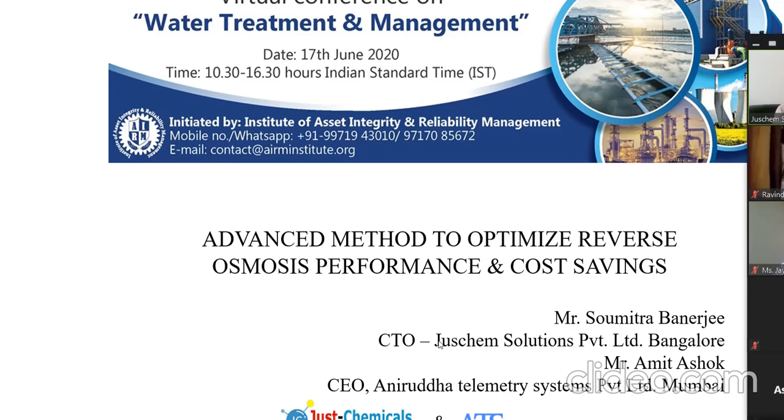My education background is MSc Applied Chemistry from Government Engineering College, Jabalpur. I have 25 years of experience in major power plants. I was head of chemistry and environment in Tata Power, Adani Power, Jindal Power, and LPGCL Bajaj Energy. I'm the founder and chief technical officer of Juschem Solutions Private Limited. My professional expertise is water treatment and power plant chemistry only.

So this is about me and about my company. I passed in 1995 and then worked with major companies, and also worked with Ion Exchange Service Limited as the branch head in Mumbai. We have a company called Juschem Solutions Private Limited here in Bengaluru, where we do power plant chemistry audit, water management, training, troubleshooting, commissioning help, consultancy for WTPs and ETPs, cooling water treatment, boiler water treatment, effluent treatment, and reverse osmosis operation excellence.

Now this is about the topic, and here is why I am presenting this topic to you: my purpose is to use our knowledge and expertise to help RO plant owners throughout India save currency in terms of reducing RO membrane costs. Why so? Because I have seen in many plants in India that the RO membranes are lasting only for 1 or 2 years, not only in raw water treatment but also in the wastewater treatment section.

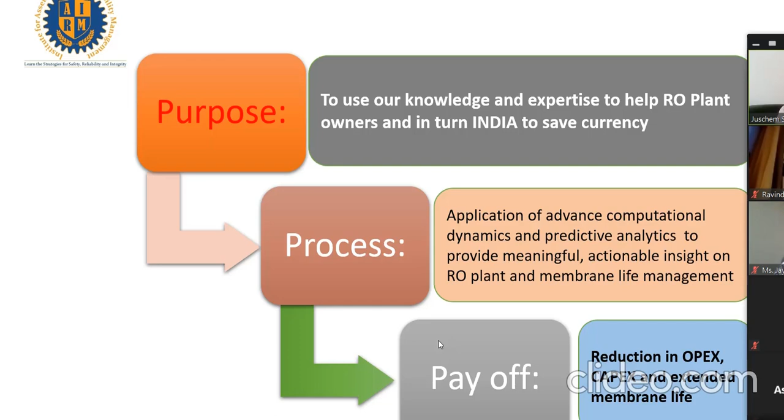So I'm going to tell you in this prescription also what commodity chemicals you must use. Our solution will give real-time health status of your membrane system, predict failure of the membrane, and importantly give prescriptions. So finally, what is the payoff? The payoff will be reduction in OPEX, CAPEX, and extension in membrane life.

So what is the current situation? I saw in the US, when I was working with Birlasoft, I went to US for GE Power. I saw there is high turnover of workforce, and in India we see lack of experience disrupting operational excellence. Data is available in plenty. Online measurement of parameters goes to DCS, but data remains data unless it is transformed into meaningful, actionable information. So data is not translating into insights and predictions.

We will do that. Our lagging indicators - we have only lagging indicators. There are two kinds of indicators: one is a lagging indicator, once it has happened, like a corrosion coupon. If we see corrosion more than 3 mpy, that is a lagging indicator, corrosion has already happened. But if you see it through a corrator corrosion meter, then it will be a leading indicator.

So we will be providing leading indicators, but the design by OEMs are only lagging indicators. There is high cleaning frequency, downtime and associated cost. Why it is so, what are the indications and what to be done will be told by our solution beforehand, at least 10 to 15 days before.

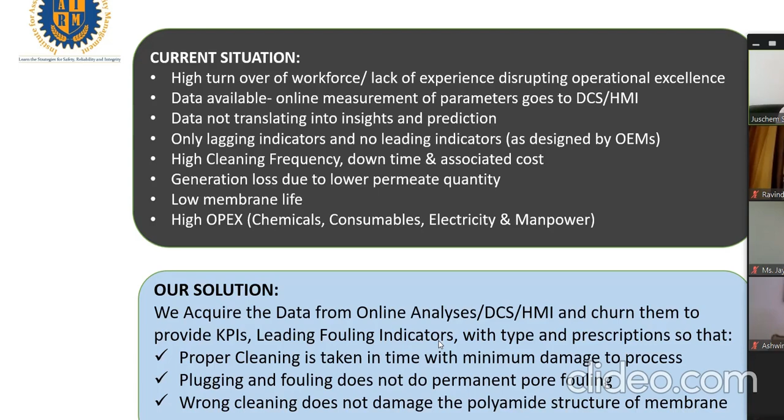So this is our solution, where we make customers well informed about operation and predictive maintenance needs, resulting in optimizing efficiency and effectiveness of processes.

So business challenges: no real-time monitoring of KPIs, reduce unplanned outages, meeting production target and demands, deterioration of plant efficiency, high energy consumption, reduced life of membranes.

Our solution reduces these operational costs by predicting and preventing membrane failures, thereby improves plant efficiency and effectiveness. It gives extended membrane life, envisage deterioration and prevention. It reduces OPEX and CAPEX. Operational effectiveness, cost and revenue savings are there with our solution, and optimize specific power and chemical consumption.

We will give you real-time analysis on your mobile, on your tab, on your computers, on your laptops, any such devices you want. And there is a predictive analytics into it. We will do the regression and send you the predictive capability to optimize maintenance schedule, operational cost, and we will let you know beforehand when to take a shutdown or when to go for cleaning.

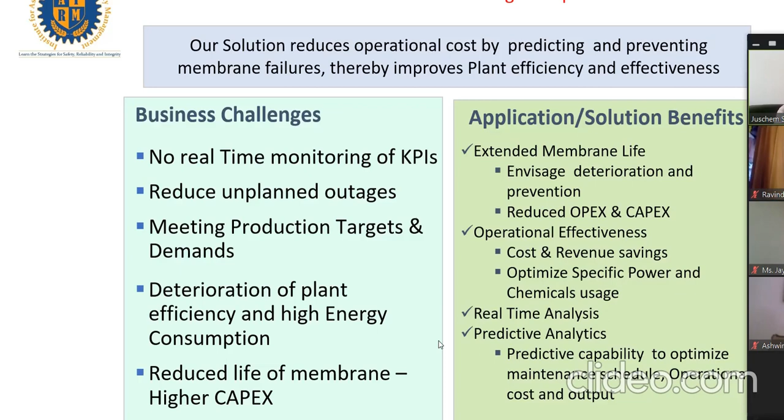So we have the ability to predict maintenance needs and membrane life using conventional and custom calculations. The problem: we are unable to predict a membrane failure using the current data, causing disruption of plant operations and high OPEX, high number of membrane change and high chemical cleaning.

So the solution will be a better predictive model to respond proactively rather than react to a membrane failure.

What are the KPIs we are going to use? Normalized permeate flow, net driving pressure, normalized salt passage, normalized differential pressure, percentage recovery, normalized membrane flux - the leading fouling index will give you a leading fouling index and will give you an RO health index.

So we'll do a fault detection on process versus sensor, and we'll let you know beforehand how to do the membrane preservation, membrane cleaning, and we'll do the membrane life prediction as well.

The next steps will be building site-specific transfer functions and select pilot sites for implementation. Requirements: the design data will be required and sensor data will be required.

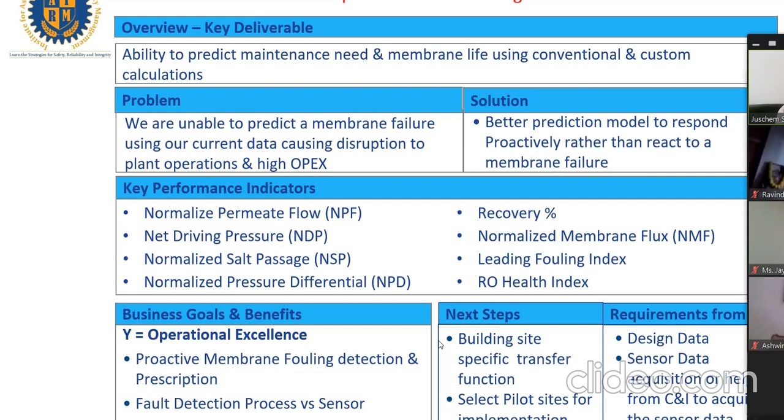For sensor data, ATS, Aniruddha Telemetry Systems, will work as a data acquisition firm who will try to get the data from HMI, DCS or the Modbus, or will replicate the online analyzers.

And this is how your screens would look like when you have it in your computer or in your laptop or in your mobile or in your tab.

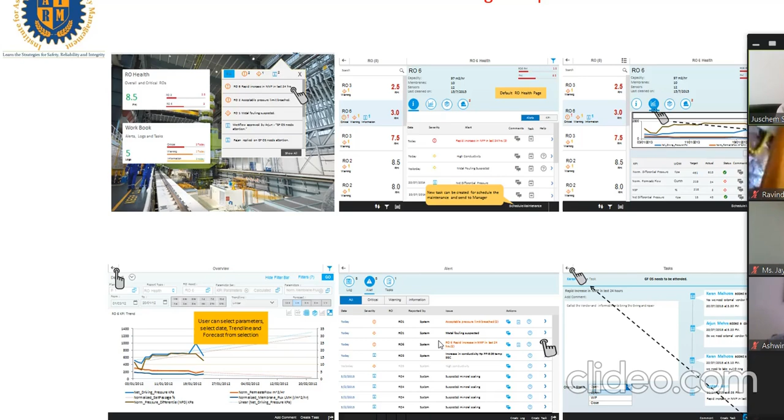We'll go to the next screen because we are not having much time in hand. We are already lost some. So we'll try to speed up a little bit.

Computers, laptops and all, and you will have all the data for all the people who are functioning, like for managers, for operators, for super managers, for chemists, everything would be there.

So actually, why am I going to do this? In my last 25 years of experience, I saw that the salt passage of the membranes increased considerably within 1 year.

In power plants like Adani Mundra or in LPGCL where we are using RO plants much, the salt passage when we install the plant is only 1%, but within 1 year, due to frequent cleaning or due to many other disturbances, it goes beyond 3. And beyond 3 means 3 times.

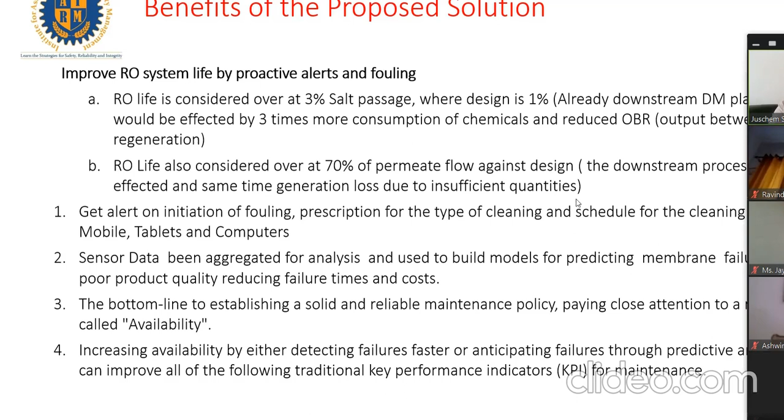The downstream processes are also affected. So we'll get alerts on initiation of fouling, prescription of the types of cleaning, on your mobile, tablets and computers. The sensor data will be aggregated for analysis and used to build models and predict membrane failures. The bottom line: to establish a solid and reliable maintenance policy, pay close attention to the measurable called availability, which will make your plant more available by detecting failures faster or anticipating them through predictive analytics.

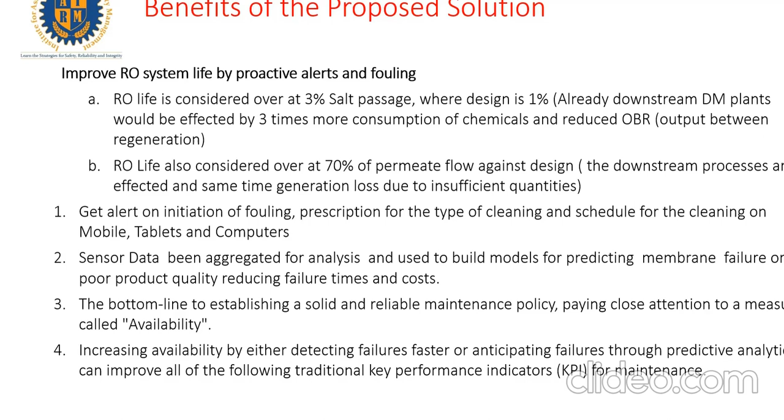So these are the current problems quantifying the business pain. There is loss of plant availability by 10 to 30% due to membrane failures and membrane fouling. There is a drop of permeate quantity by 10 to 30%, and a drop in quality where salt passage increases drastically. Some people even run at 10% salt passage, I've seen them. And there is an increase in specific energy consumption by 10 to 25%, because permeate quantity is reducing but electrical consumption remains the same.

And there is a reduced life of membranes due to time-based cleaning.

Reverse osmosis membrane based plants are used to produce water for potable or industrial purposes. They are also used in seawater desalination and wastewater recycling. Like all petrochemical plants such as BPCL, HMEL, they have huge RO systems for recycling wastewater as well. The membranes are imported to India from US, Japan, and China. Till we produce petchem, the polyamide, which will be 100% export, we need to save foreign currency. BPCL Kochi is planning to make this petchem polyamide, but I don't know when that time will come.

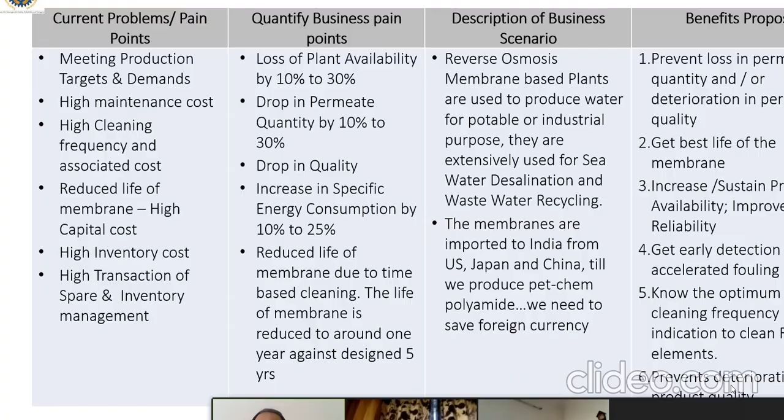This is how it will look. Now here is an indication, you'll see the red star here. That red star indicates that your fouling has initiated and is going to cause a problem. So if you do not clean within this period, the fouling is going to permanently damage your membrane and you may have to replace it faster than you should. This is the lead PPI, lead plant performance index, which will help you identify when to clean, when you get the indication.

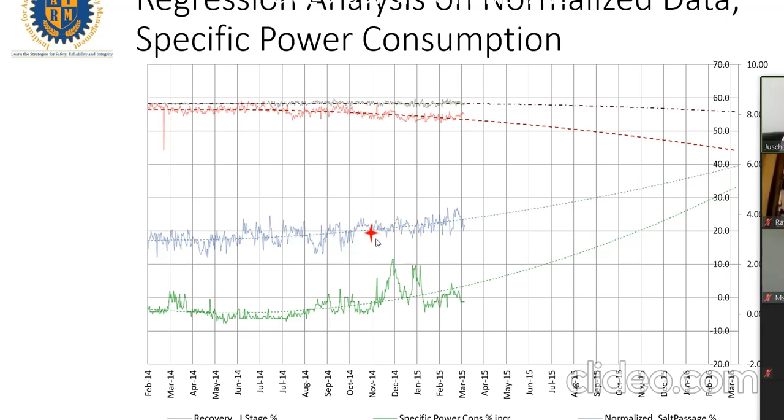And here it is. Again, if you see the NDP, net driving pressure, is increasing, then you need to clean this membrane, and this indication will come earlier, telling you when to clean it.

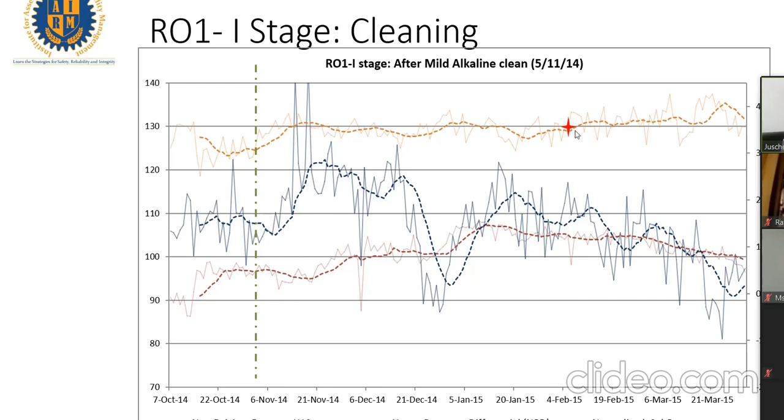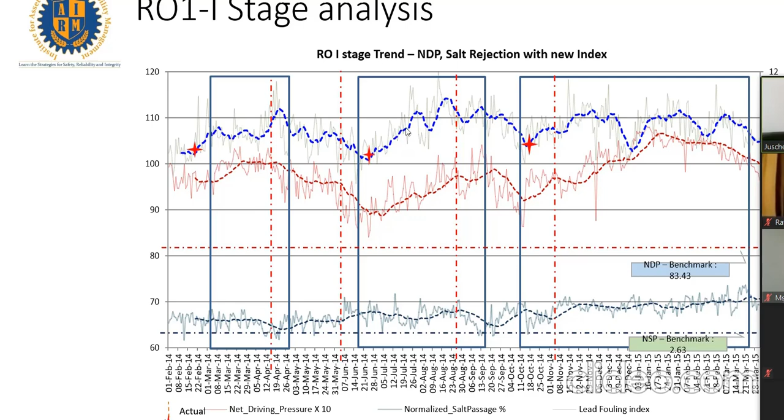This is an example of one use case where we did RO first stage trending, and we gave them a solution indicating this is the time to clean. They cleaned it, and slowly the lead fouling index started coming down. We give the lead fouling index again, saying this is the time to clean, and they take cleaning here. But when they take cleaning here, the baseline data does not come back to the original, you see. So the delay in cleaning has caused this problem. You need to clean it somewhere earlier so that you get an optimum result out of your membrane.

Now again here, the same thing, RO first stage trend, NDP and NSP, normalized salt passage. We indicate here and you see the trend if they do not do the cleaning properly. This is in one of the biggest cement plants in India, and the delay in cleaning has caused them a lot of problems.

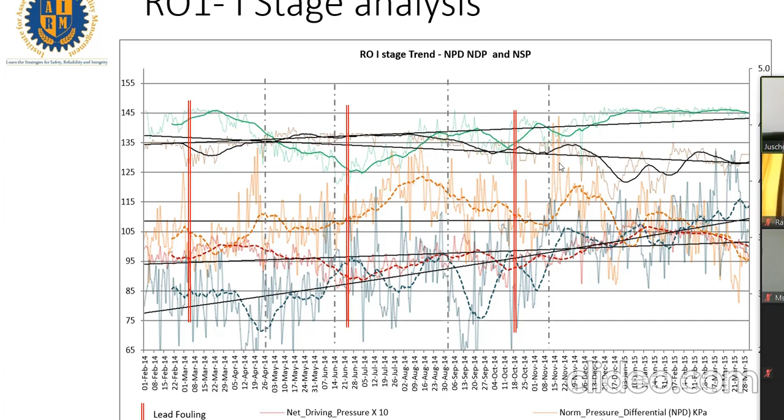So the normalized graphs and regression analysis explain good and bad operation and maintenance practices with good chemistry control. This red star will denote in the slide as it predicts the fouling as lead fouling index almost 45 to 60 days before. In the use case, the specific power consumption went to 10.5% more than the actual. The specific power consumption was predicted to go 20% higher by November 2015; it was done in August 2015. The normalized salt passage is on the higher side and deemed to touch 5 to 6% by November.

So this was one of the cases where we gave them the solution and they were happy with it. And this was one of our trials of our software IoT product.

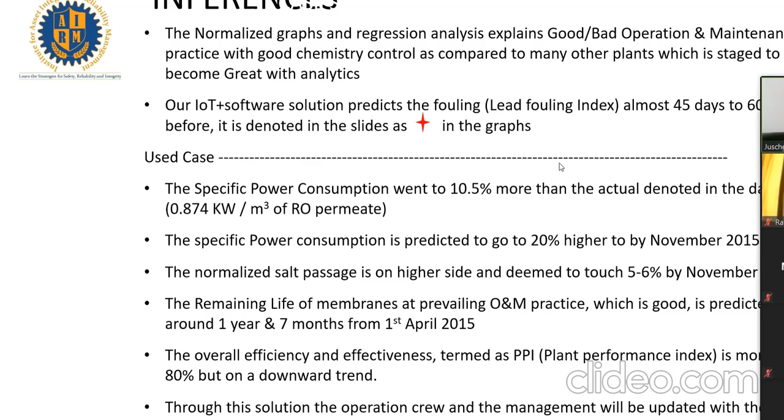We will not call it software, but this is the IoT product, Internet of Things, where we take the data, churn them in an analytical engine, and give you the actionable insights. Like the observation points were indicating suspended solids fouling and/or metal oxide fouling in the first stage front end membrane elements, scaling in second stage membrane, and we offer real-time indication and health indicators and daily dashboard.

The benefits were keep watch on the performance in real time and planned cleaning operations. So these were the operation points. In November 2015, the NSP, normalized salt passage. Salt passage is what? Suppose we feed 1000 ppm TDS or 1000 microsiemens of conductivity, though both are not equal. But for example, if we feed 1000 microsiemens of conductivity inside, and we get 10 microsiemens of conductivity outside, the salt passage is 1%. And if it is 30 microsiemens, the salt passage is 3%.

And 3% is the maximum allowable and even recommended by membrane manufacturers. But here in this case, the salt passage may have gone to 5 to 6%. So we give them prediction on critical parameters and help them reduce and control this normalized salt passage. Then specific electricity consumption also: because the permeate quantity was reducing day by day and the electric consumption was remaining similar, we told them that if you do proper cleaning schedules based on our software or the IoT alerts, you will be able to reduce the specific electrical consumption as well.

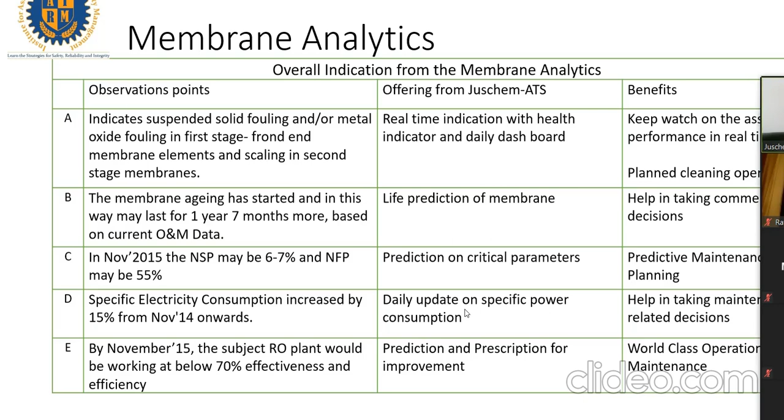And the subject RO plant was working below 70% effectiveness before our solution was implemented. They did the implementation and they got world-class operation and maintenance. Now their membrane life is 5 to 7 years, from earlier 1.5 years. So the NSP of the plant was already operating 162% higher than the design, with reference to the Dow membrane data sheet, and the proactive indication of deviation of plant effectiveness indicated NSP or SR, and predicted the life of the membranes based on the same. So we prescribed them the way of increasing membrane life by modifying the upstream processes, root cause elimination, chemistry changes, and proper cleaning schedule.

We do not tell about specialty chemicals, we tell about commodity chemicals. We do not say Calpol, we say paracetamol. So in the next thing, the NSP gradually increased to 327% higher than the design. NSP is normalized salt passage. In an easy way, we can say that this is the outlet conductivity, the permeate conductivity, which gradually increased above the design. Our solution could solve it.

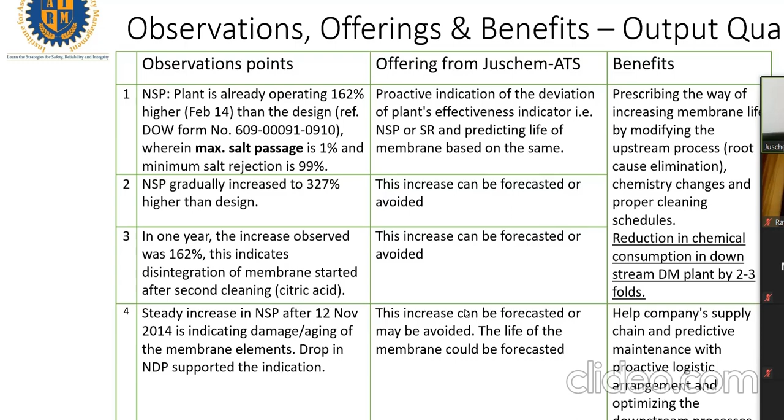And there was a steady increase in NSP even after 12th November 2014, and again our solution helps companies with supply chain and predictive maintenance so that they do not have to bring in more membranes, because membranes have to be ordered either from the US or China or Japan, and they take 2 to 3 months for supply. So with our solution, the membrane life increases and the operational cost decreases, both OPEX and CAPEX. So what do we get from this? Membrane life increased, energy and OPEX cost reduced, business case for replacement, purchase planning advantage. We can plug our solution into SAP or other ERPs you are using. The demand and fulfillment is also done properly.

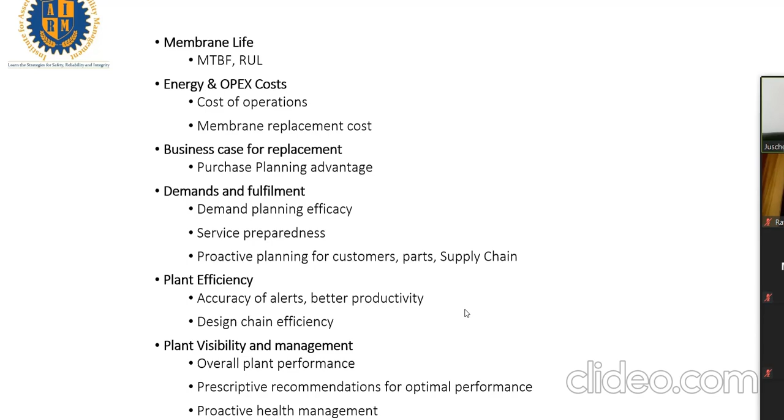Plant efficiency, the accuracy of alerts, better productivity, design, chain efficiency, etc. Plant visibility and management. Everybody who is operating, everybody who is managing, even the head of operations, even the head of the plant can see how the system is performing. So membranes are typically used in water treatment plants. This is what I have told, and this is a single slide which explains everything you can get out of this.

And I hope AIRM, Institute of Asset Integrity and Reliability Management, is going to share either the slides or the video with all the participants and speakers so that you can keep them in hand to see the benefits of our solution. 40 to 50% membrane replacement cost saving is sure.

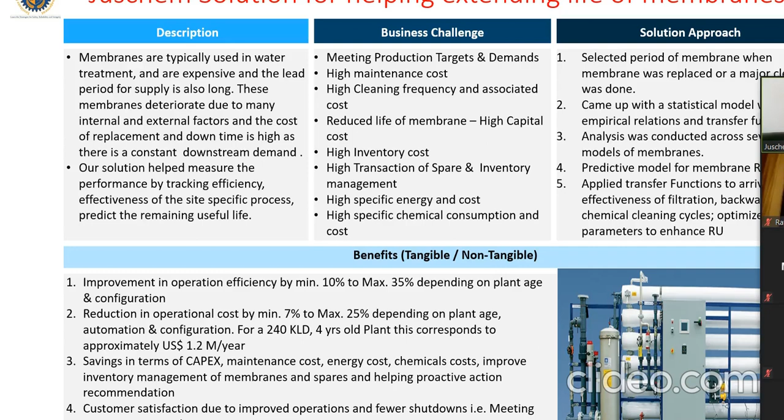So what we do: system operating logs, system monitoring, useful actionable information, various lead and lag indicators we take, we do the data collection, we do the statistical modeling and get predictability algorithms. There are some custom algorithms which we have used here. There is performance effectiveness predictability, and then you'll get alerts and early warning dashboards, forecasting and water footprints, and you'll get equipment health reporting and recommendation.

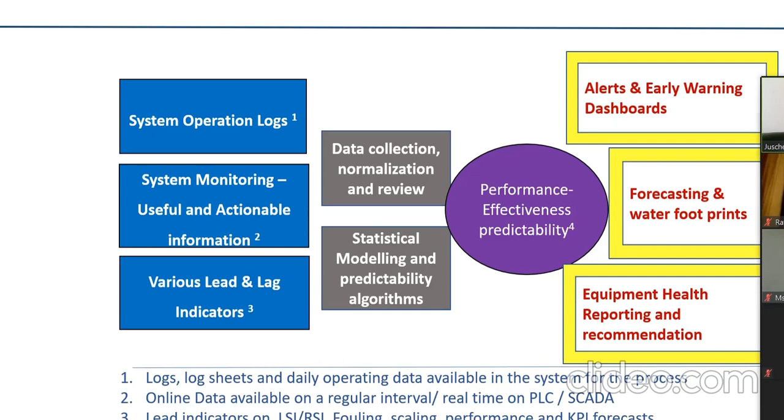So it will also have logs, log sheets, and daily operating data available in the system. Online data will be available for everybody in real time, as on PLC and SCADA. Lead indicators on LSI, RSI. Now we have included Puckorius and Larson also into this, and fouling, scaling, performance and the KPI forecasts. I'll go a little faster now.

These are the sensor data I know. I need these sensor data: the flow of inlet, flow of permeate, flow of concentrate, and if there is an intermediate from first stage to second stage or second stage to third stage, that flow I will need. I will need the temperature of the inlet, the feed temperature. I will need the pressure of feed, permeate, concentrate, total concentrate, total reject outlet, and intermediate, first stage reject going

to second stage. I will need conductivity, I will need pH of feed, permeate, concentrate and intermediate, first stage to second stage. I will need ORP, oxidation reduction potential of the feed, silt density index of the feed, and turbidity. Bigger plants do have automatic silt density index, like HMEL I've seen, HPCL-Mittal Energy Limited in Bathinda, known as Bathinda Refinery. They have an online SDI meter. That data also can be acquired.

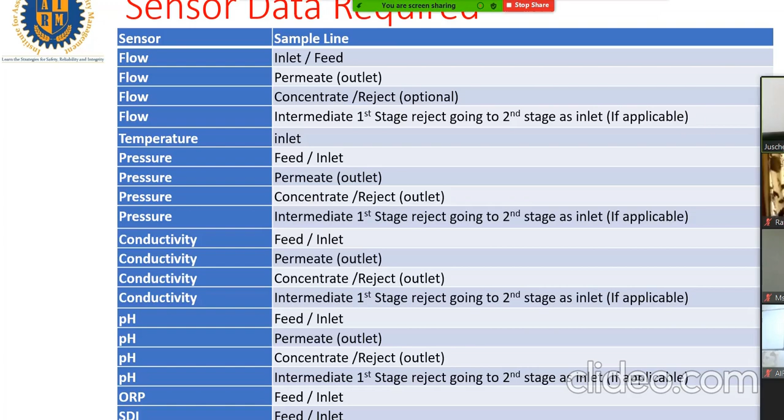Otherwise, if you have an offline measurement system, then you have to key in the data in the system we provide, and turbidity also you have to feed, though turbidity is not so essential. So what do we give you? We give you the data. There are many algorithms which go inside, because normalized permeate flow is not something which can be easily calculated. It needs a longer calculation, in an Excel sheet at least 8 or 9 columns long.

Then net driving pressure, normalized salt passage, normalized pressure differential. These are important, these will tell you what is happening inside your system. And I've seen very few plants which are measuring all these regularly, not even weekly or daily. These need to be analyzed weekly, daily, and we do it every 15 minutes in our solution.

So why NPF, why NPD? What are the indications we get? NSP is normalized salt passage, NPF is normalized permeate flux, NPD is normalized pressure differential. So if there is a rapid increase, it is metal oxide. But if it is biological fouling, the symptoms will be different. Salt passage will be decreased, and there will be a marked increase in NPD, not rapid.

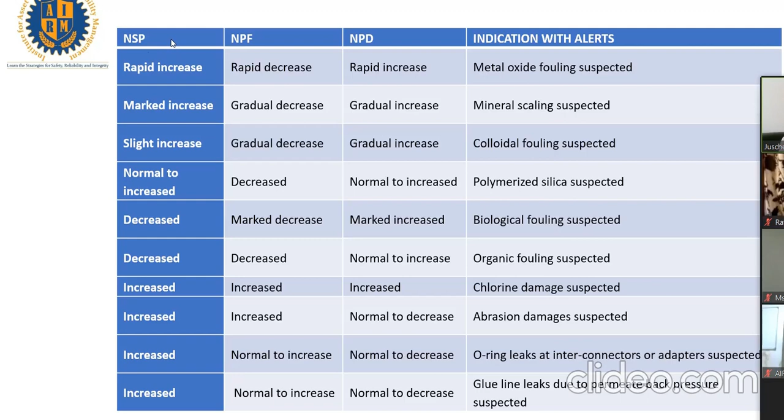So these give the indications of what kind of fouling or problem is going on inside your RO plant, whether it is metal oxide fouling, mineral scaling, colloidal fouling, polymerized silica suspected in the tail or second stage membranes, or biological fouling. All these will be alerted by our solution.

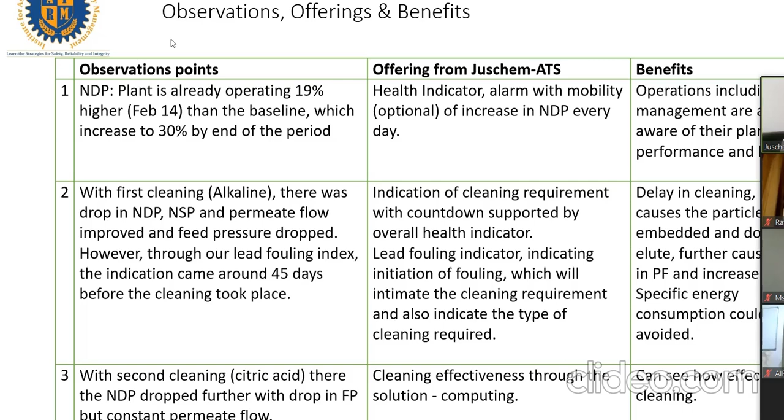In that plant we had NDP which was already operating 19% high. With the first cleaning, alkaline, there was a drop in NDP, permeate flow improved and feed pressure dropped. However, our lead fouling index indication came around 45 days before the cleaning took place. With the second cleaning, citric acid, the NDP dropped further, with constant permeate flow.

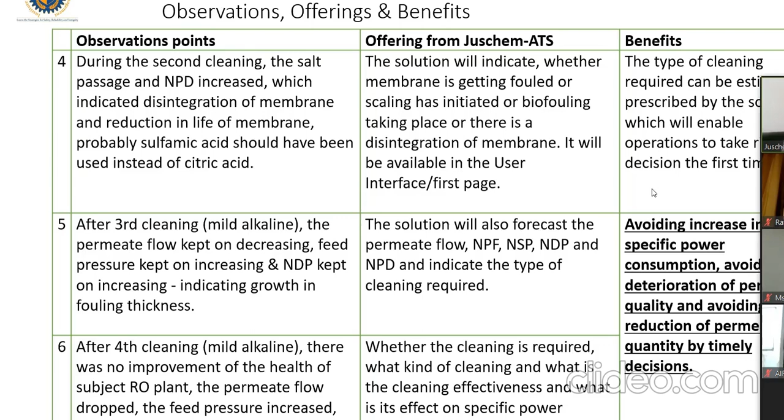So there are many observation points which we gave them, we offered solutions, and we also gave them the prescription of what is required through our UI. Further, NPD was operating 42% higher, which causes membrane telescoping, and when that happens the membrane is no longer useful, so membrane life is decreased. We give the indication beforehand, and the membrane life is saved.

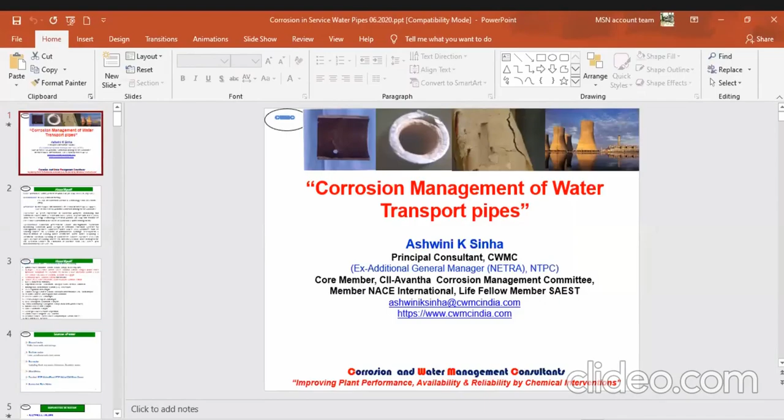Ashwini, sir. Yeah. To share your screen, or I try? Just 1 second, I'm trying. Is it visible? Not yet, sir. Is it visible now? Yes, sir, visible. Good afternoon, everybody. Sorry, first I was trying with the normal web link, that's probably where the problem came. So I downloaded Zoom, and then the sharing worked. No problem, sir. Absolutely no problem.